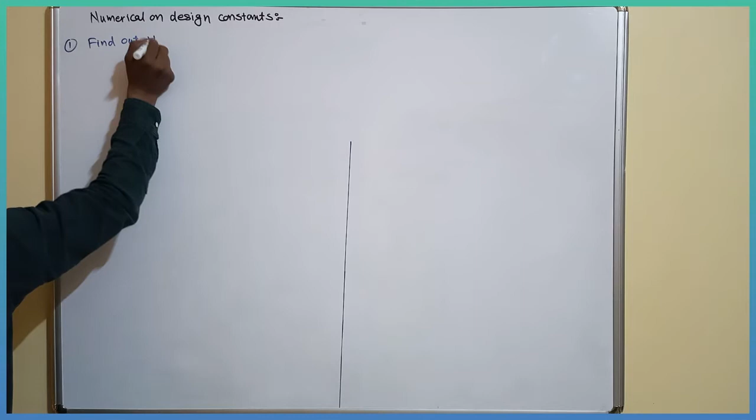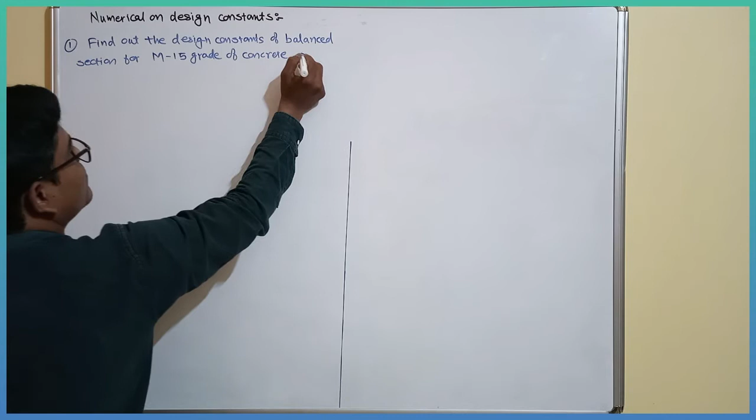Design constants. So first one, find out the design constants of balanced section for M15 grade of concrete and Fe415 grade of steel. So for that we have to find out the design constant.

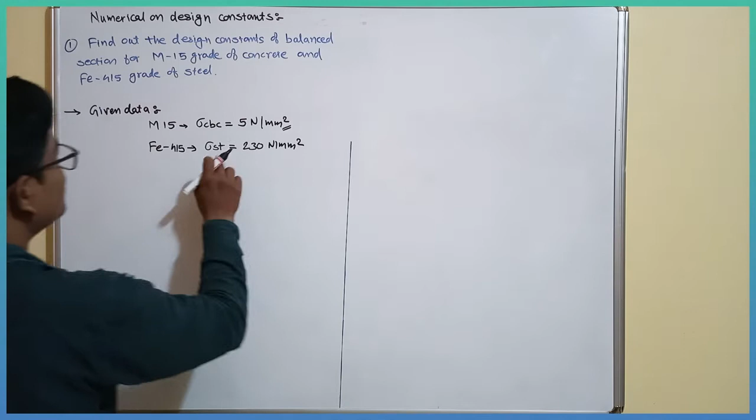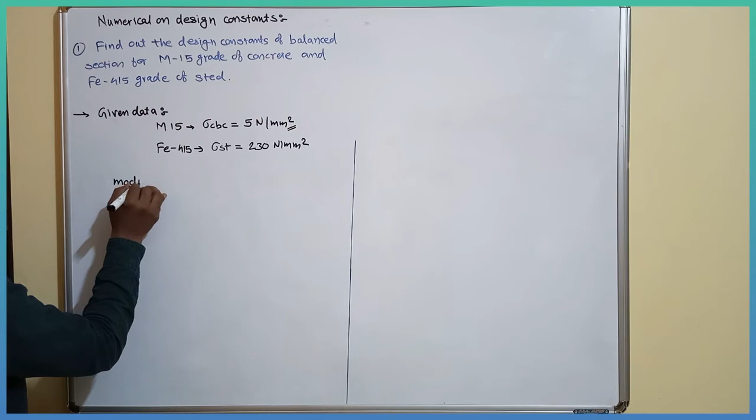So by using sigma CBC we can calculate the modular ratio. So in working stress method there is a new concept evolved, that is modular ratio, and the formula is given that modular ratio small m is equal to 280 divided by 3 sigma CBC.

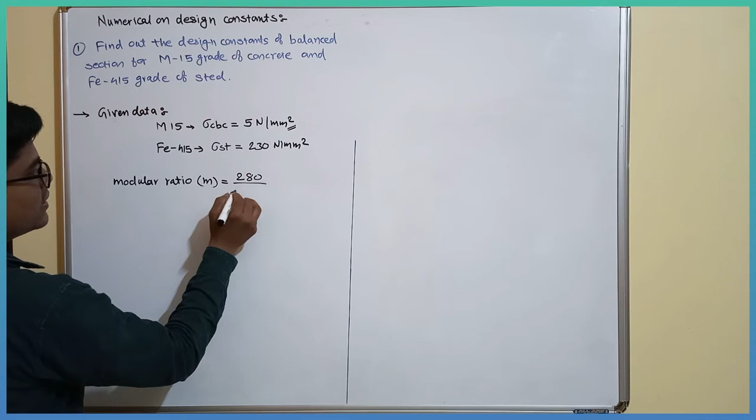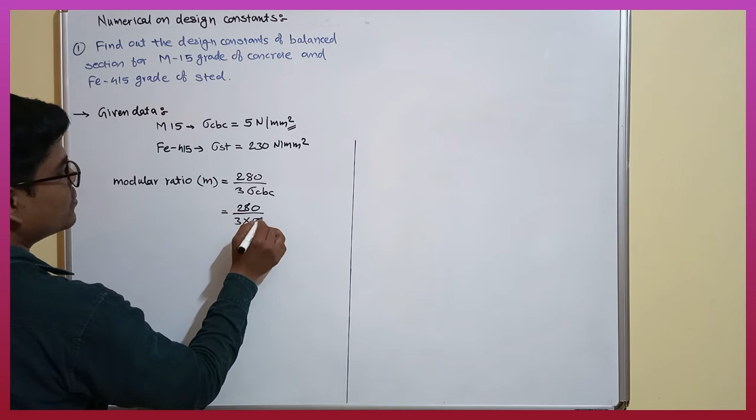So sigma CBC is nothing but the permissible compressive stress due to bending in concrete. So that value is 5 Newton per mm square. So we can put this value. So 280 divided by 3 into 5. So it will be 18.67. So this is the modular ratio.

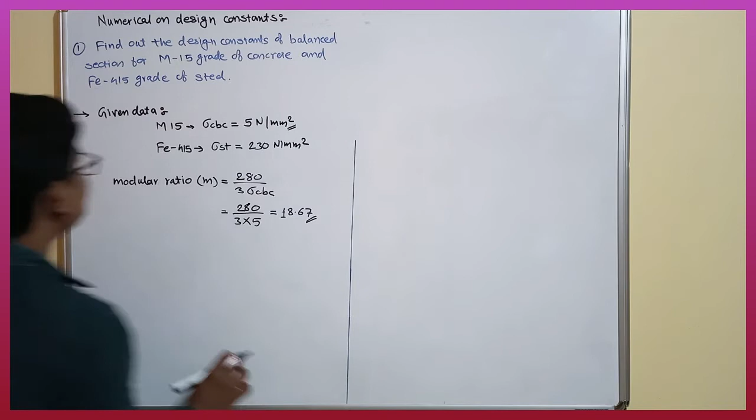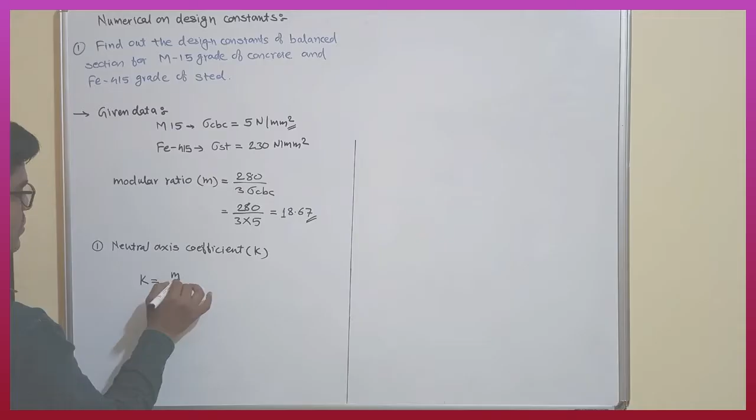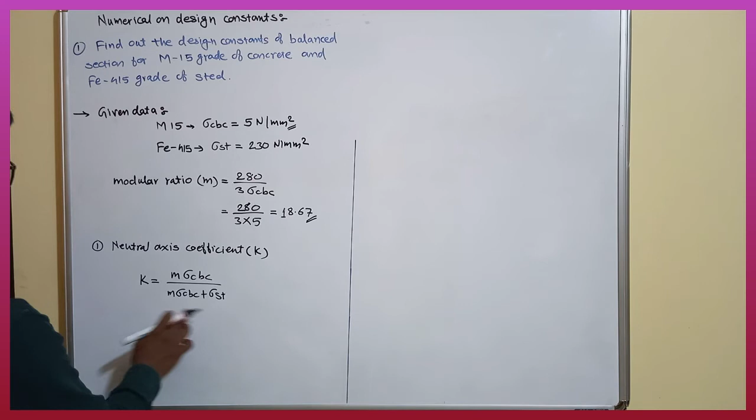So after that we have to calculate the design constant. So first design constant is neutral axis coefficient, which is denoted by small k, and the equation for neutral axis coefficient is k is equal to m sigma cbc divided by m sigma cbc plus sigma st. So we have to put these values of modular ratio, permissible stress due to bending in concrete, and permissible stress in steel. So these values are given.

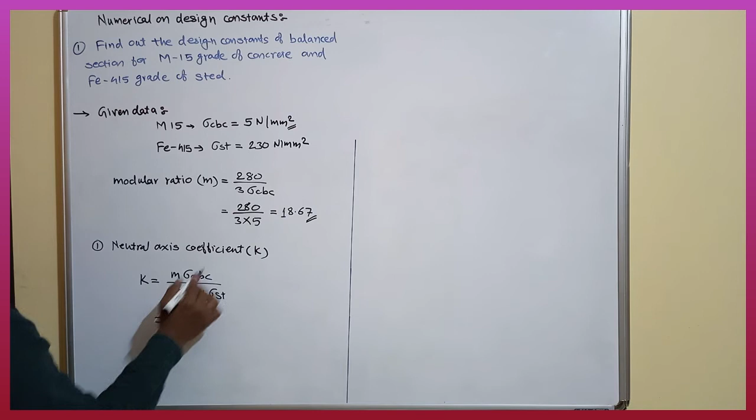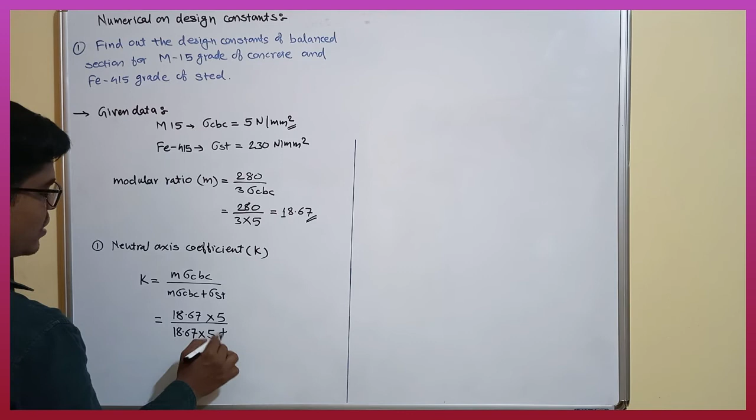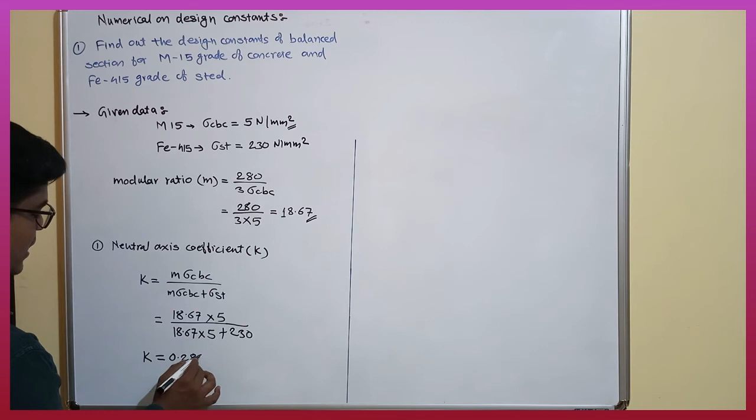So k is equal to 18.67 into sigma cbc is 5 Newton per mm square divided by 18.67 into 5 plus sigma st, that is 230. So after calculating this, we will get the value of k is 0.288. So this is the value of k, means neutral axis coefficient.

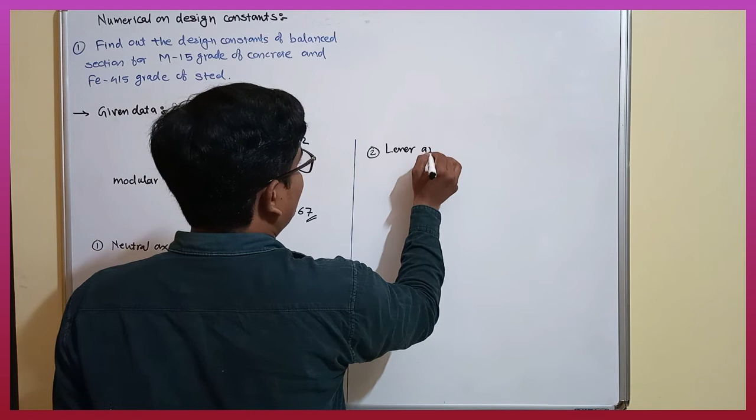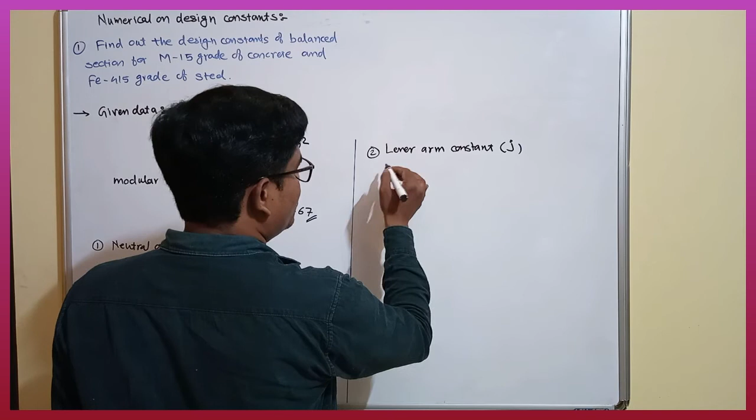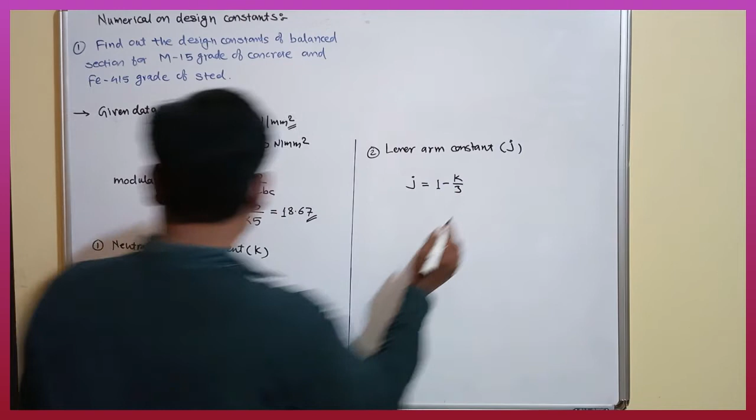So after that we have to calculate the second design constant, that is lever arm constant, which is denoted by small j. So the formula for this lever arm constant already we have derived in previous lecture. J is equal to 1 minus k by 3. So already we have calculated the value of neutral axis coefficient, that is k, that is 0.288. So we have to put this value into this equation. So 1 minus 0.288 divided by 3. So after calculating this, we will get the value of j, that is 0.904.

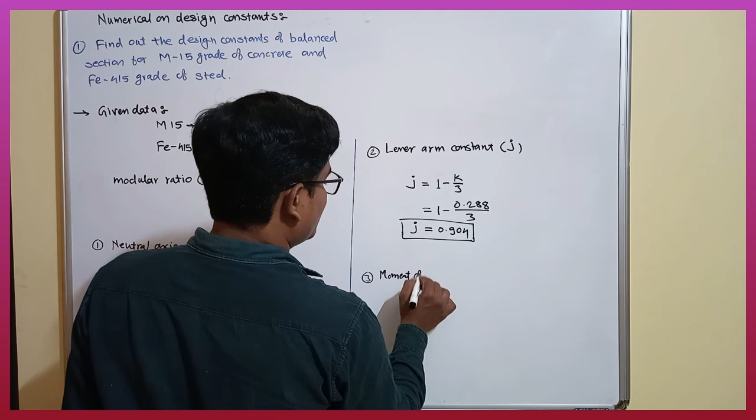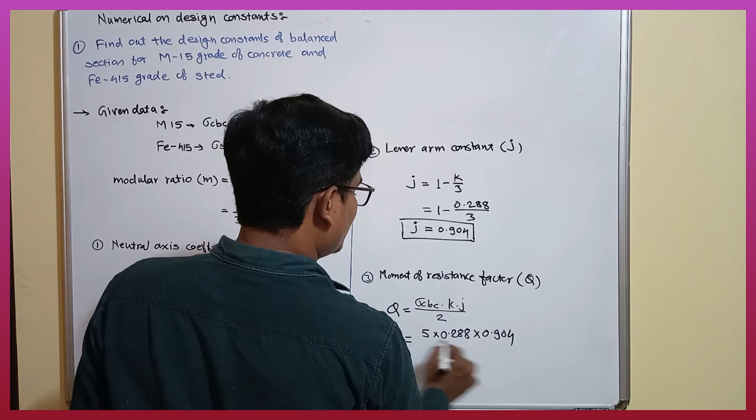After that, third one, moment of resistance factor, which is denoted by capital Q. So the formula for Q is equal to sigma CBC into K into J divided by 2. So this is the formula to calculate the moment of resistance factor. So just we have to put the values of sigma CBC, that is 5 Newton per mm square, into value of K, that is 0.288 into 0.904 divided by 2. So after calculating this, we will get the value of Q 0.65.

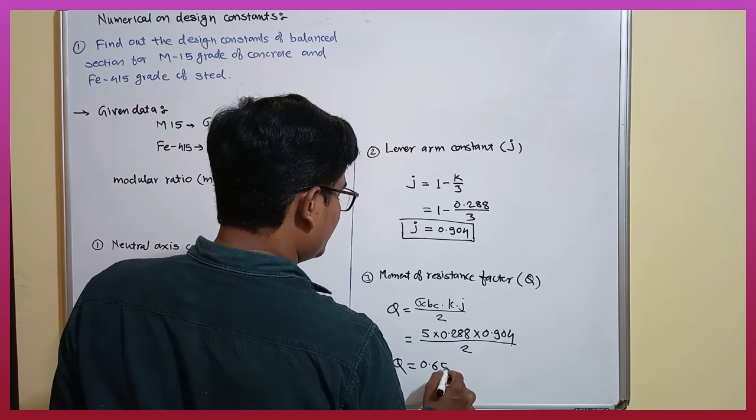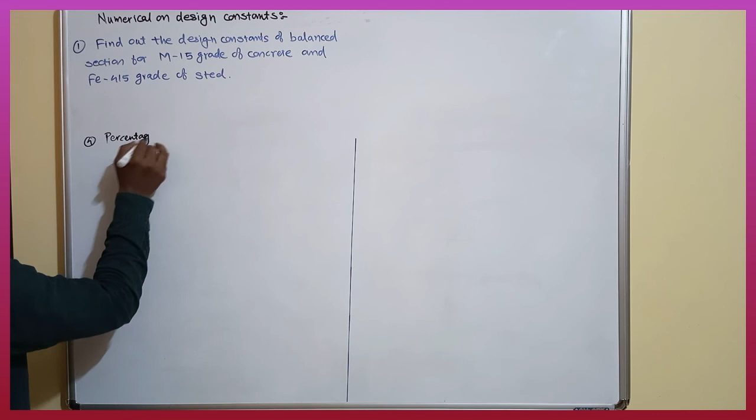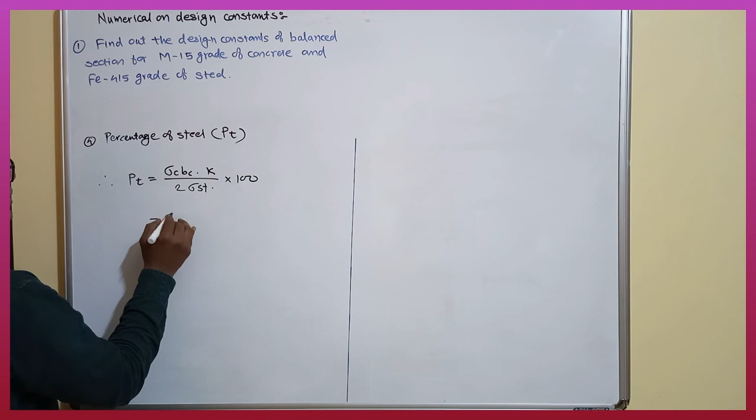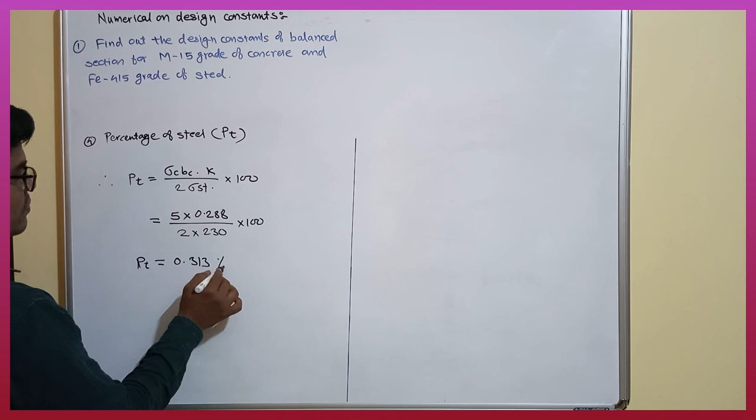After that, next design constant, fourth one, that is percentage of steel, denoted by PT. So we know the formula for percentage of steel. PT is equal to sigma CBC into K divided by 2 into sigma ST into 100. So sigma CBC is 5 into K is 0.288 divided by 2 into sigma ST is 230 into 100. So it will give the percentage of steel, that is PT. After calculating this, we will get 0.313 percent. So this is the percentage of steel.